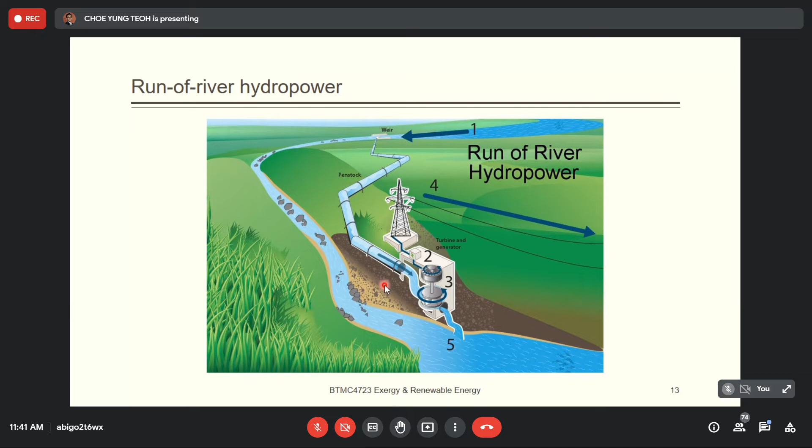Actually it's quite seldom and rarely used in commercial systems because the power generated from the system is normally quite low. Maybe you can build just to power a rural village, but to generate a commercial power plant, normally we will not use run-of-river hydropower. The power output is relatively low.

So the second one is called storage hydropower. Most commercial hydropower systems actually use storage hydropower. First, you need to build the dam.

The dam must be built where you have a large drop in elevation, a very big height difference. You can see that mostly you build it between two mountains, and then build the dam between them. This is not because of the height, but to save material.

Now, you want to make a reservoir, so you have to minimize the amount of material used. Normally the dam, the reservoir, will be built where you have a very narrow opening, because in the narrow opening, of course, the wall, the dam, that you need to build is much smaller.

At the same time, you need to cover the entire area, because the other area will be blocked by the mountain. There's only one path to flow out, so you block that path. This is the best idea.

So you build a dam to increase the water level, and you will store a lot of water behind the reservoir, depending on the rainfall. Then we have an intake.

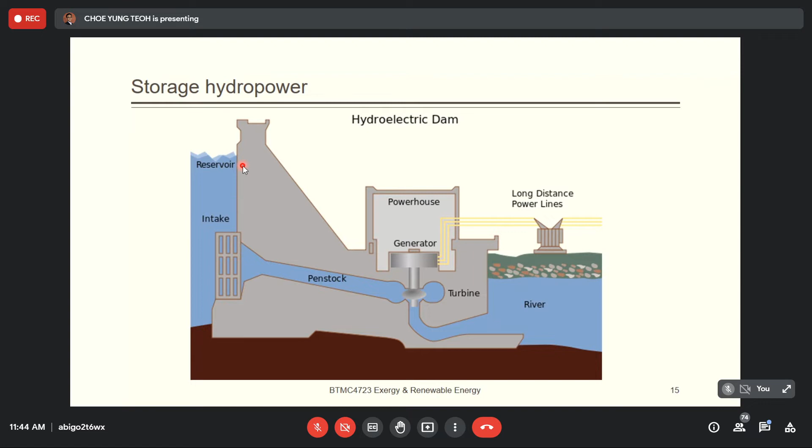Okay, this is the operation of the hydropower plant. I think it's the same as what I explained before.

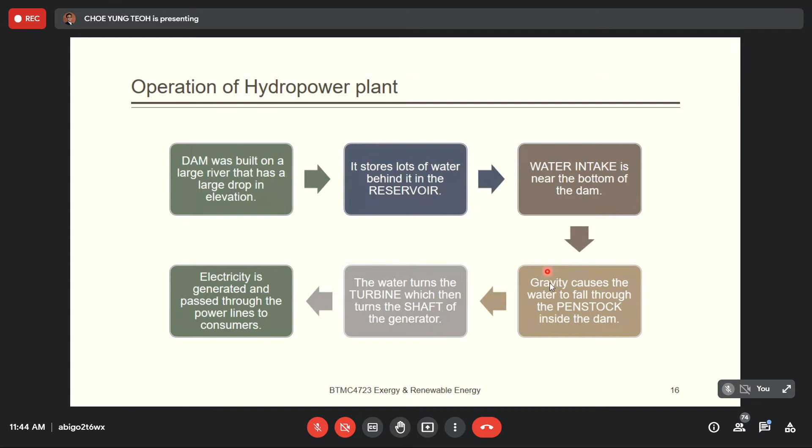Now let's look at the good advantages of storage hydropower. Typically it's a large system that uses a dam to store water in a reservoir. Electricity is then produced by releasing water from the reservoir.

There's one very special advantage of hydropower compared to other types of renewable energy: storage hydropower can provide base load as well as the ability to be shut down and start up at short notice according to the demand of the system. It can act as a base load because you can control the output. You store the water in the dam, so whenever you need, you can just adjust the number of turbines. Normally a dam has a few turbines.

Let's say you have 4 turbines. Depending on the demand, you can choose to operate 1, 2, 3, or all 4 turbines, and the output will be very consistent. Not like a wind turbine or PV photovoltaic, where the output totally depends on the input. But with hydropower you can control it because you have storage, storage in terms of water.

It also has the ability to be shut down and start up at short notice. For renewable energy like PV photovoltaics and wind energy, we are not going to start up and shut down constantly. We generate and capture as much energy as possible because we have no storage.

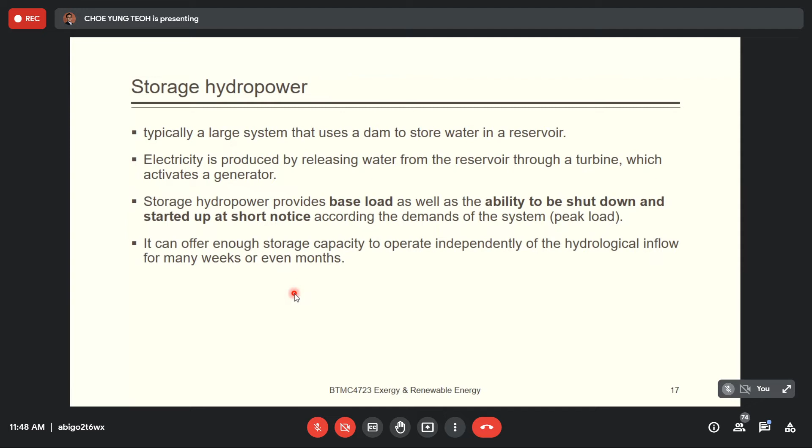Now we try to learn about the measurement of the head of hydropower. So let's say this is a hydroelectric dam, with points A, B, C, D, and E. How do we measure the head? Is it from A to B, A to C, A to D, A to E, or maybe C to E?

Any idea? Maybe think about it. It's been a long time since I took attendance, so this will count as attendance. I gave you 5 minutes together with the short break - give me the answer. I will put up a poll.

So we have a few options: A to B, A to C, A to D, A to E. What else? Maybe intake to C. Try to vote for your answer. Remember, even if you don't really know, still answer since it's related to attendance. I will do the summary at 11:53.

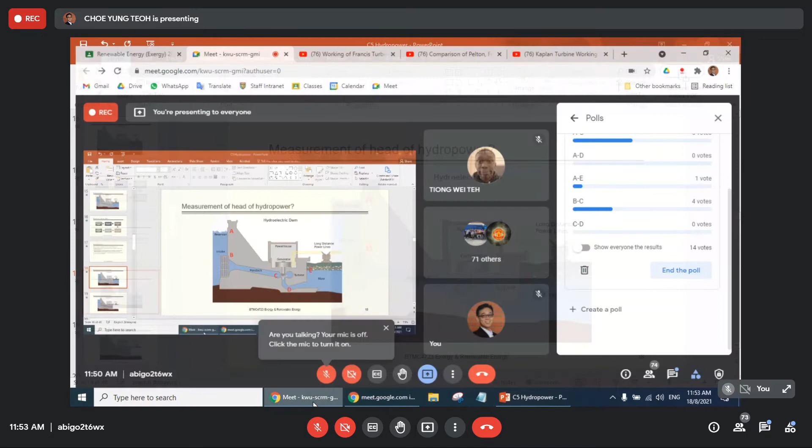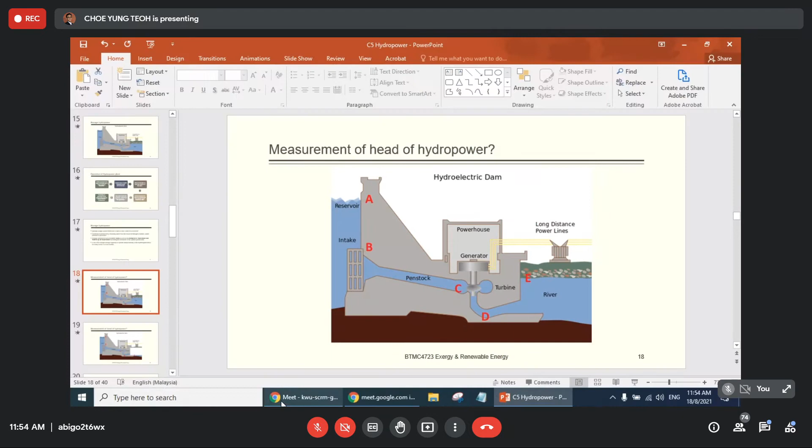Okay, A, B, C, D, E. Very few of you got the correct answer. The actual answer is AE. I think only 1 of you chose the correct answer, AE.

Okay, why? First, look here, A, B, C, D, E. We want to measure the head applied on C. But there is a head between point A and point C, which pushes the water out. At the same time, there's also a head between point E and point C, which pushes the water in. So to find the pressure difference at point C, you should take AC minus EC, so the only head you have is actually AE.

Maybe I'll give you another scenario. This looks like a U tube, filled with water. This is the turbine, and the water level at E is over here. So because of the height difference, the pressure pushes the water to flow through the turbine toward point E.

No question? Then let's talk about pump storage. Pump storage is where you use the turbine or pump to pump the water at night time. You can see at daytime, the water passes through the turbine, rotates it, and generates electricity. At night time, you use something to power the pump to pump the water upward.

What can power the pump? Are you going to use oil or fossil fuels to power the pump? Definitely not, because if you want to use oil to power the pump, why not just burn the oil at daytime to generate electricity instead? Remember, when you do the conversion, some energy is lost, so we try to minimize the number of conversions. So what kind of energy is always available at night but not in the daytime? If not harvested, it will be gone — it won't be stored.

Any idea how we want to power the pump at night? Yes, wind energy. We normally have stronger wind at night, but there's no demand for it at night. Factories may not operate 24 hours, just during daytime, 8 to 5 or 8 to 6. So at night time, you have excess energy which you can use to power the pump. Normally this system is attached to wind energy, a wind turbine. But is this considered wind energy or hydro energy? I would say the origin is from the wind, but the mechanism used is hydro. The mechanism is definitely hydro, but the origin of the energy comes from wind energy.

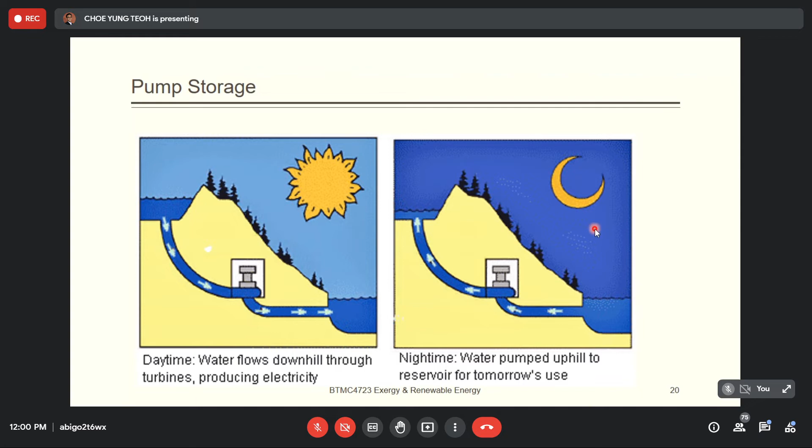Okay, next we talk about type of turbine. There are many types of turbine, so how do you want to pick the most suitable pump for your system? In general, we have 3 types of turbine: impulse, reaction, and gravity turbine.

Impulse and reaction turbines are quite widely used. Gravity turbine is not really used for electricity generation. Impulse turbine, if you read the word impulse, means that you use a very high velocity jet to push the turbine to rotate. You give the impulse in terms of water, something like a jet, high velocity jet, to rotate the turbine.

Secondly, we have the reaction turbine. Reaction turbine means that you have a very high flow rate. This flow will pass through some aerofoil blade of the hydro turbine and then create the pressure difference which imposes the lift force and rotates the blade. This is what we call the reaction turbine. In a reaction turbine, normally it will be fully immersed in the water.

And then for gravity turbine, it uses the weight of the water to rotate the turbine. It's more straightforward, simple, but of course you will not get too much energy output because you just use the weight, not the pressure.

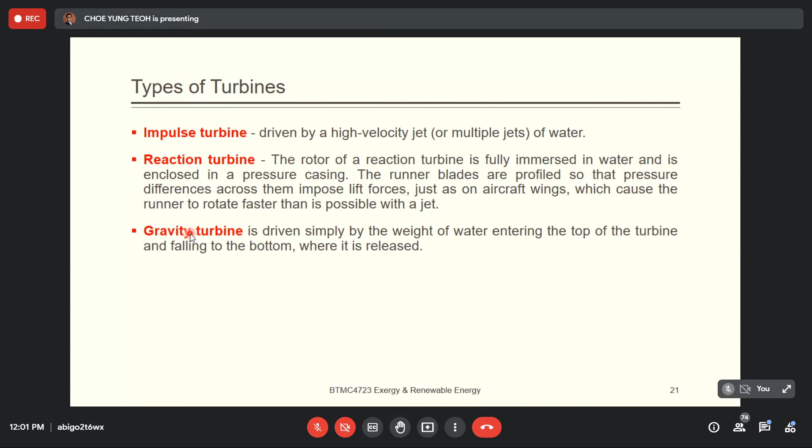So we will go through them one by one, starting with impulse turbine. Here we have 2 types of impulse turbine, which is Pelton and Turgo. Pelton is the more well-known impulse turbine. It's driven by a high velocity jet, or multiple jets, of water. You can see that the jet of water pushes on the cup over here, over the turbine, and rotates the turbine on the vane and blade. This one we call the Pelton turbine.

And then you can see that actually the cup is something like this, something like a crab shape. You can see there's an opening at the back, just to allow the continuous flow. After you push on the front blade, you go to the second blade, or cup. So you have to continuously push on the blade to rotate. This is the idea: you push on the blade to rotate.

The second one we call the Turgo. The only difference is that the Turgo has the jet enter at a certain degree, maybe around 20 degrees, to the plane of rotation. This one you can see is 90 degrees, straight, pushing on the blade and rotating. But for the Pelton turbine, one jet can only hit one blade or one cup at a time.

But this Turgo turbine, because it enters at 20 degrees at the side, makes it possible to use a larger jet relative to the turbine pitch diameter. It can handle more flow rate per time. So if you have a higher flow rate, then you can consider using the Turgo turbine.

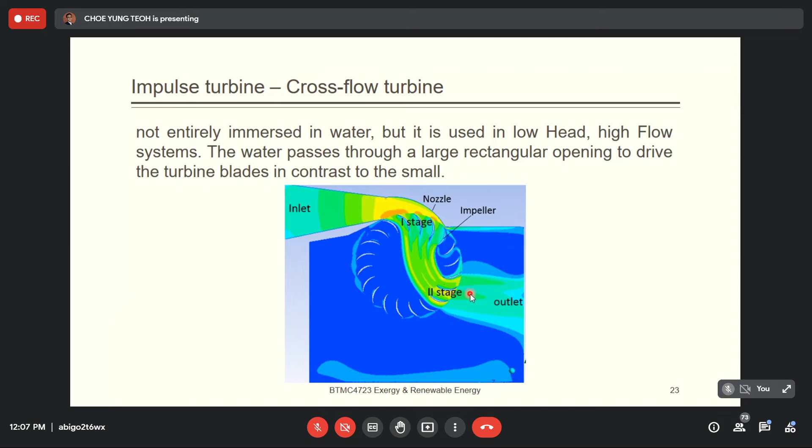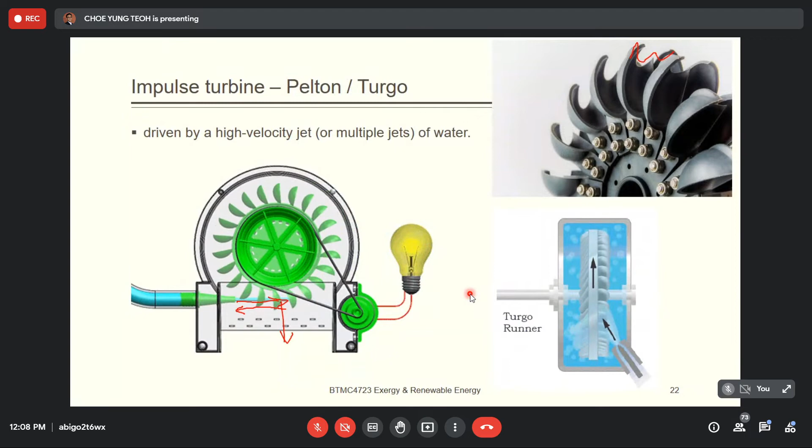The next one is called the reaction turbine. The Francis turbine is the most widely used water turbine today. This type of reaction turbine is an inward flow turbine that combines the radial and axial flow concepts. The Francis turbine is the most common water turbine used today, combining radial and axial flow. Later I will show you how it's combined.

This is a type of turbine that develops torque by reacting to the pressure or weight of the fluid. They use the weight and pressure of the fluid, and the operation actually uses aerofoil theory, meaning it creates a pressure difference, which creates lift force, which then rotates the blade.

Before we look at the Kaplan turbine, let's look at the Francis turbine. The flow goes in from the side, which we call radial flow, passes through the turbine, and goes downward, becoming axial flow. So it goes in by radial and goes out by axial.

Now we have the new one called the Kaplan turbine, similar to the Francis turbine, but now it has movable blades. The blades can adjust according to the flow and pressure, giving an adjustable blade to achieve efficiency over a wide range of flow and water levels. It's more complicated because the blade angle must rotate to get higher efficiency. Supposedly the Kaplan turbine has higher efficiency, but because of the moving parts, the cost is also higher.

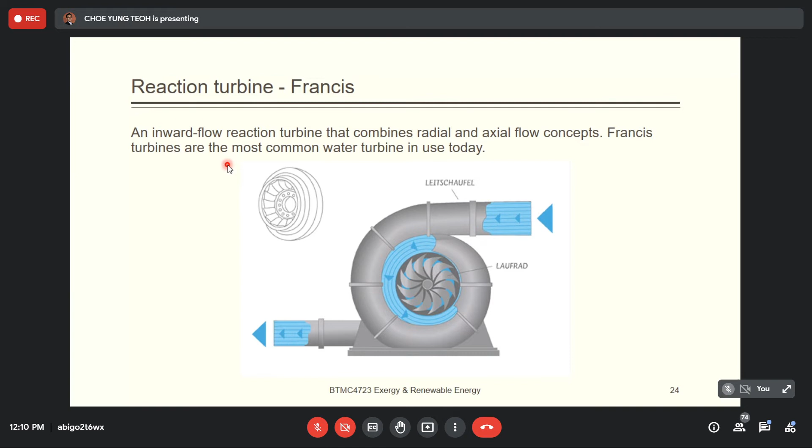In most situations, the flow rate and head are quite consistent, so we don't really need a Kaplan turbine, which caters for different flow and water levels. We use the Francis turbine, which is good enough for many cases. That's why the Francis turbine is the most commonly used water turbine—cheaper and good enough for standard water levels and flow rates. In certain situations where the flow rate and water level keep changing, then we can use a Kaplan turbine.

This Kaplan turbine allows efficient power production in low head applications. So whenever you have low water level, you can use a Kaplan turbine. So how do we do it?

You can see that the blade of Francis turbine is something like straight. So if the head is very low, the water, because the opening is very big, will just go through the turbine and then go down. It won't rotate the turbine. It will flow out through the turbine, but the turbine is not rotated.

Remember that the turbine is connected to a generator. You need quite a very high torque to rotate the turbine. So if the head from the water, or the pressure of the water, is too low, then you cannot rotate the turbine. But for this Kaplan turbine, it's very easy.

Now the head is very low, so I change the blade angle. I make it flat, something like I close the opening. So now, the water has no choice but to press against the blade to go through and flow downward. So in this case, you are still able to operate at the low head condition.

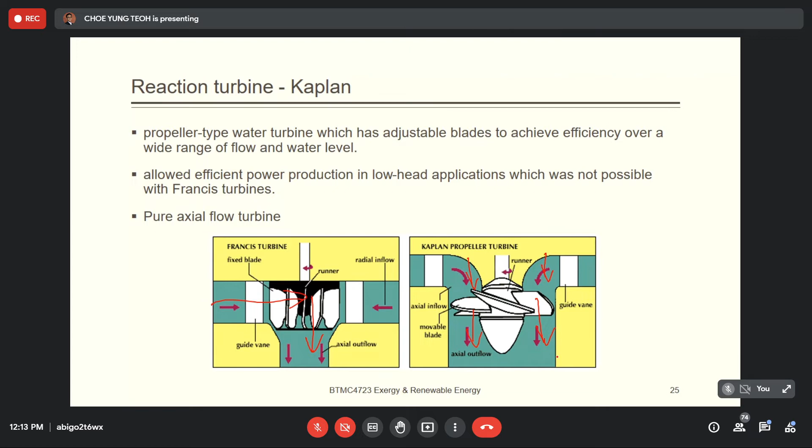So this is the difference between Francis and Kaplan. In terms of outlook, it should be like this: Kaplan turbine, you can see this one you can rotate the blade, and then Francis turbine has a fixed blade.

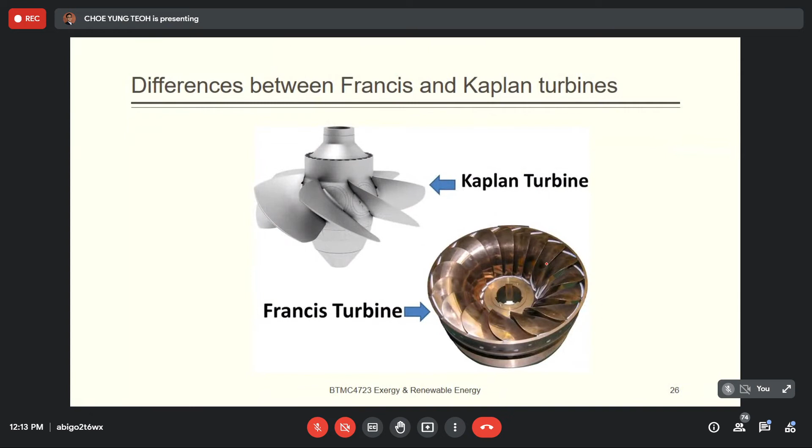And this one is more compact. The head - normally we need higher head to operate the Francis turbine than the Kaplan turbine.

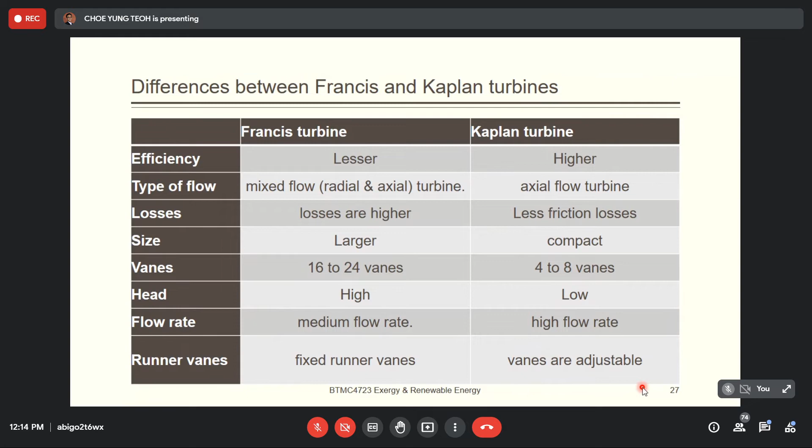The next one is called gravity turbine. You can call it Archimedes screw or overshot water wheel. So we just use the water density, the weight of the water, to rotate the blade. You hold the water and then the weight of the water will rotate the turbine.

Normally the efficiency and power output is quite low. Normally it's not for power generation, but just to rotate a pump or whatever. It's a quite traditional method of usage of this hydropower.

This is the turbine classification. You can see that we have different head classifications, so which type of turbine can be used? Below, more than 50 meters, you can use Pelton or Turgo, which is very high head. For medium head, this is the turbine you can use. And for low head, this is the turbine you can use.

You can see that gravity turbine is only applicable for low head - even with high pressure, no use. Notice that the intake is just a water flow. If the pressure is high, then it will just pass through the turbine. You can see that if water pressure is very high, it will flow very fast, so it just goes down, lower. It won't rotate the turbine.

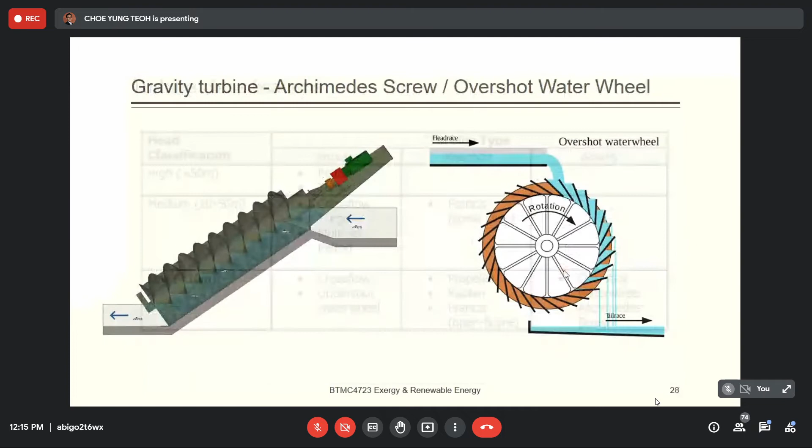So this gravity turbine is normally only applicable for low head, which is not suitable for power generation.

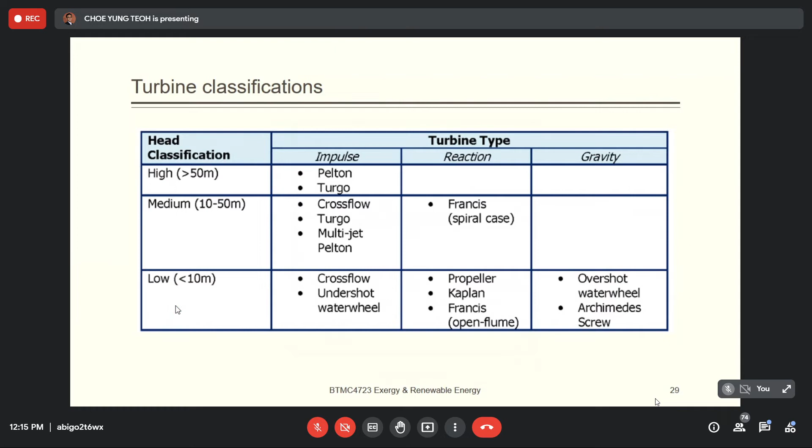If we look at the more detailed picture, this one shows the relationship between head and flow. We have 6 types of turbines here. So let's say at a head of 50 meters and a flow of 10 cubic meters per second, what kind of turbine can you use? You can base it on this figure, this graph, to identify which type of turbine you can use.

Okay, so let's say this one I said 50 meter head and 10 meter cube per second of flow. So it's really this one. So you can use Francis turbine, you can use the Kaplan turbine. These two only, the two that are at the end already, so normally will operate at a very good efficiency. So you can use Francis and Kaplan at this case. You can base on this one.

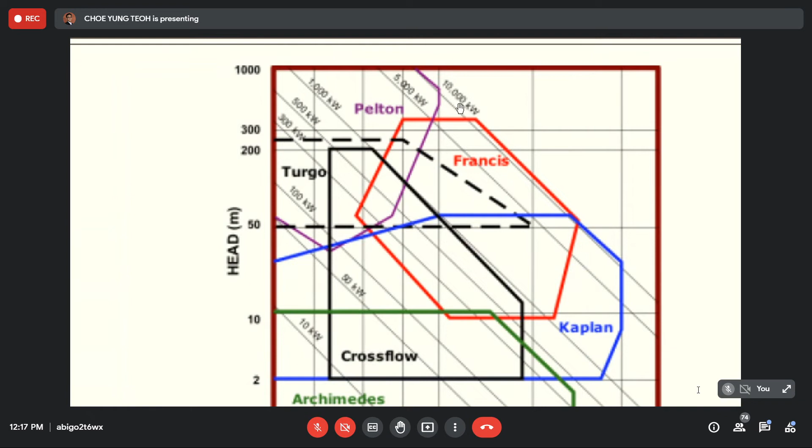Another thing, other than head and flow, you notice on this chart the diagonal line shows power: 10 kilowatt, 50 kilowatt, 100 kilowatt. So you can see that Francis turbine is normally operated at a higher power, meaning it's a larger scale, up to 10,000 kilowatt. But some of the turbines are not able to operate at a high power. For example, cross flow up to 1,000 kilowatt only, but Francis can get up to 10,000 kilowatt, 10 times higher. So you have to consider the type of turbine, what power output, what head and flow you have in the system, and then you will choose.

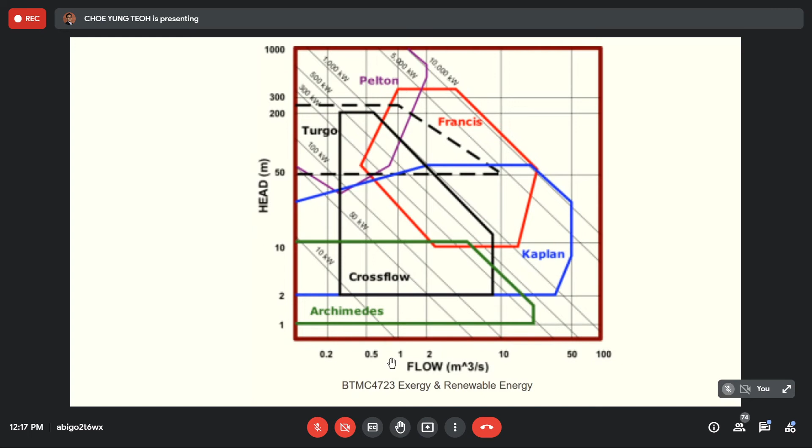But the head here is of course the net head, and the flow here is the design flow, not the flow of the river. So this is the best guideline to choose the type of turbine, but of course this is just a general guideline. Francis turbine also has different types and comes from different manufacturers, so you should always refer to the specification given by the manufacturer.

For example, something like this, they'll give you the minimum flow range for that kind of turbine. For example, Francis turbine minimum flow range is 0.5 meter cube per second. Below this, Francis scale turbine cannot be used. And the maximum flow range is 900 meter cube per second. You can see the range is actually very, very huge compared with other types of turbine, where the flow can go up to 900 meter cube per second. But you can see that Pelton is just 60, 10, 50, so comparatively a very, very low flow rate.

And then the minimum head. You can see that Pelton and the Turgo are actually impulse turbines, so you need a higher head to operate, at least 50 meters of head, and the maximum gets up to 1,000 meters of head for Pelton turbine. Francis turbine can already operate at 10 meter head.

And you can see we have this optimum flow exceedance. What does it mean by flow exceedance? Flow exceedance is the percent of time that the design flow is exceeded. What's the meaning? Something like this: the water level keeps changing, changing from 5 meter to 10 meter, 5 meter to 10 meter throughout the day. So let's say my design flow is set at 8 meters, so some of the time the water level will be more than 8 meters.

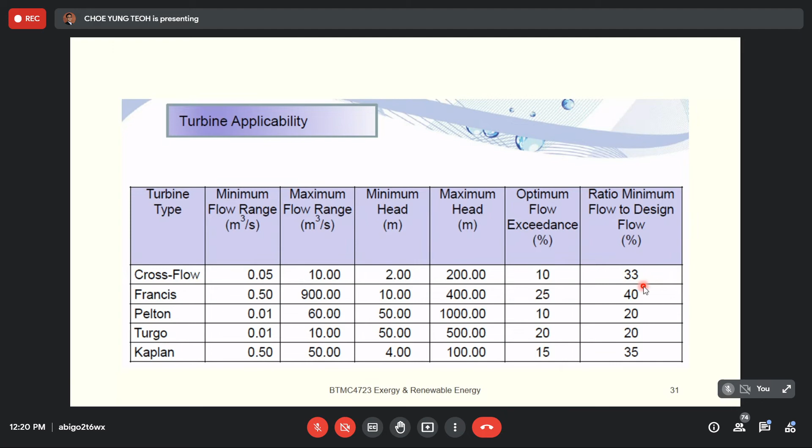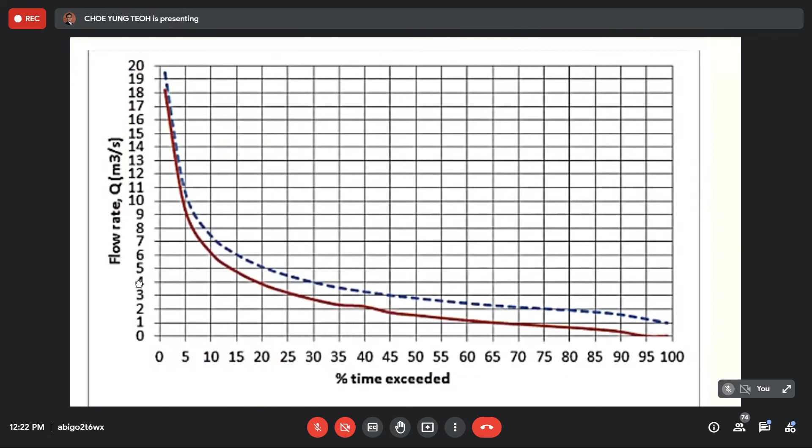First question: indicate the percent of time that the design flow is exceeded. So the design flow is given as 2.7 meter cube per second. Where is 2.7 meter cube per second located? At here, you see.

Do you understand the graph? This shows the flow rate against the time exceeded. At a very high flow rate, the time exceeded should be lower. So in 1 year, let's say the flow rate is 17. In 1 year, 3% of the time, the flow rate is more than 17. Can you understand the concept here?

So let's say I take the flow rate of 1 meter cube per second, here. It means that 60% of the time, the flow rate is more than 1 meter cube per second. This is how we read the graph.

And then you always have the 2 lines. One is called total flow, one is called the available flow. Total flow will be different from available flow because some of the flow will be restricted by environmental or legal conditions, maybe in terms of how much water you can release to the downstream per unit time for flow rate. So you always have the total flow and available flow.

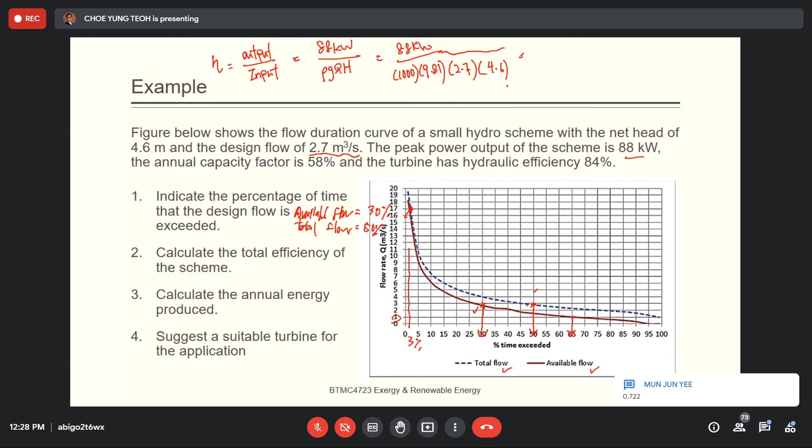So the total efficiency is 0.722, or 72.2%.

Do you notice that the question gives you the hydraulic efficiency of 84%? Hydraulic efficiency is not referred to as the total efficiency. Hydraulic efficiency is defined as a ratio between the power given by the water to the runner of the turbine and the power supplied by the water at the inlet of the turbine. So it means how many percent of the water can be absorbed by the turbine - that's what we call hydraulic efficiency.

But the total efficiency includes the conversion and transmission to the grid, including the generator efficiency. Hydraulic efficiency just depends on the turbine itself - how much energy of the water can be absorbed by the turbine, and then the energy from the turbine rotates the generator and produces electricity. So the total efficiency will normally be lower than the hydraulic efficiency. This just confuses you by giving you this value, but actually we don't use that in the calculation.

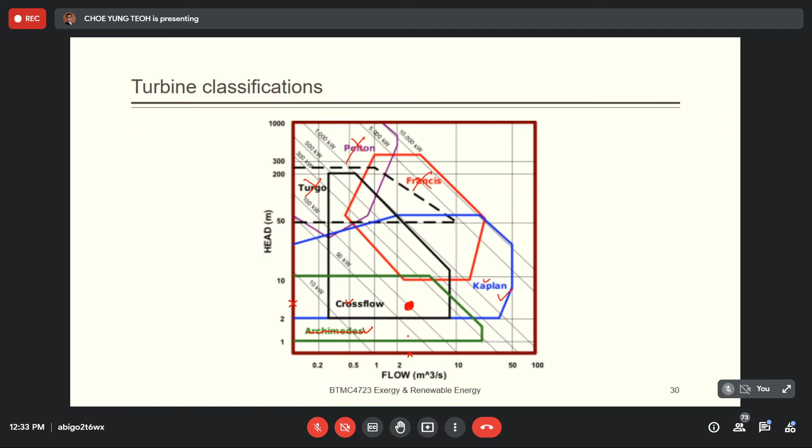So cross flow and Kaplan. Kaplan normally will give you better output and it's more widely used as well. But of course you could choose cross flow, I cannot say you're wrong, because based on the table it's still within the range. Okay, so in this case we can use a cross flow or Kaplan turbine. So you suggest, based on the flow rate, the head, and also the power output, the Kaplan turbine is a suitable turbine for this application.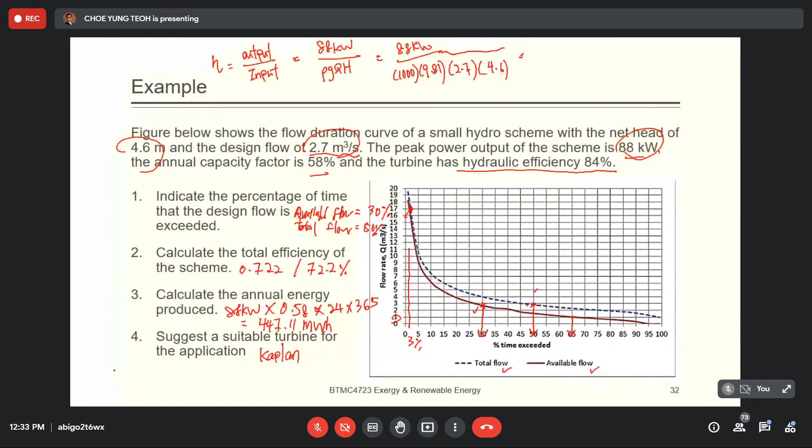Okay, then we move to the next one. These are the advantages of hydropower. Okay, pollution free and clean.

So do you want to cut off the 'clean'? It's no longer green - the operation is green, but the development is not green. So if you want to use the word green, you have to further justify what you mean by green. It's green during operation, but during the construction of the dam, it actually generates a lot of carbon dioxide. Okay, next, very high efficiency, up to 95%.

Little waste of heat - you do not generate any heat from the system, only a little bit from the friction of the rotation.

While the initial cost is high, they are very low cost overall. Normally a dam can operate for 100 years, so although it's very expensive, it can last for a very, very long time. So in the end, they are very low cost in general. It is very reliable, and the output can be easily adjusted based on demand without affecting efficiency.

It can be a recreational advantage. Normally the dam can be made as a park, a recreational park. And then it can be used for water storage - you can store the water, and it can act as flood mitigation. You can control the flood because you control the water flow downward to the downstream, so in other words, you're able to control the flood.

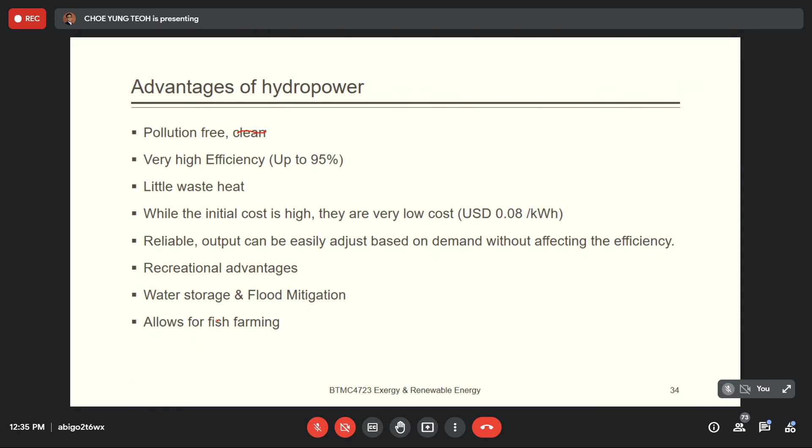And then it allows for fish farming - other than storing water, the dam can also be used to farm fish. Okay, this is the advantage of hydropower, and of course they also have disadvantages.

So first one, it will affect the riverine ecosystem and alter the hydrological cycle. Riverine ecosystem means how the fish live in the river. Now you change the water level - do you know that different types of fish survive and live at different heights or different water levels?

Some of the fish are not able to survive in very deep water, maybe because the pressure is too high. But some fish in the river need very deep water. So if you change the depth or change the water level, it will definitely affect the riverine ecosystem.

And because when you build the dam, the water level mostly on the upstream will increase, then the plants under the riverbed definitely will not get enough sunlight, because it becomes too deep and they are not able to get the sunlight.

And then it also alters the hydrological cycle. Hydrological cycle means how the water moves from the land and ocean surface to the atmosphere and back in the form of precipitation. So now you change the location where that water is, so of course you change the hydrological cycle.

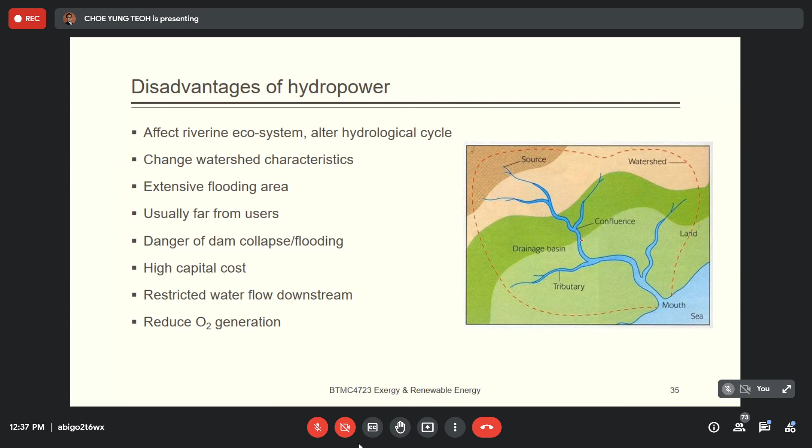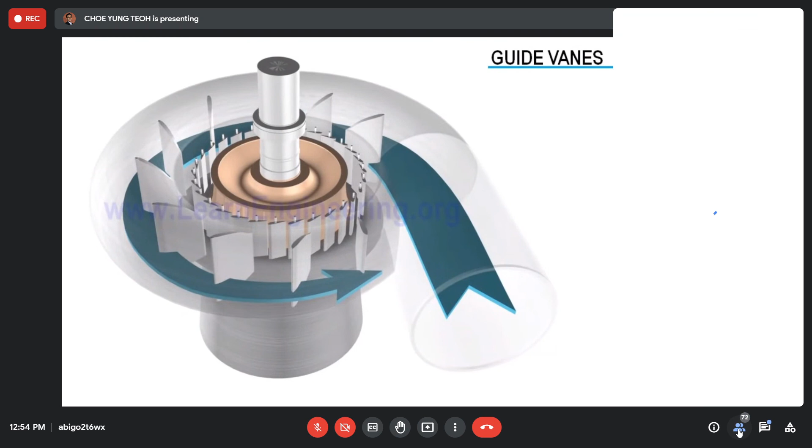Demand for power may vary over time. The guide vane mechanism is used to control water flow rate and make sure that power production is synchronized with power demand.

Apart from controlling flow rate, guide vanes also control the flow angle to the inlet portion of the runner blade, making sure that inlet flow angle is at the optimum angle of attack for maximum power extraction from the fluid. Low pressure at the exit side of the turbine may cause serious problems of cavitation.

So a carefully designed draft tube is fitted at the exit side to discharge the fluid out. The draft tube transforms velocity head to static head due to its increasing area, and reduces the effect of cavitation.

Hope you had a nice session on the working of Francis turbines. Thank you.

Okay, so have a look at the comparison between Pelton, Francis, and Kaplan turbines.

Francis and Kaplan are the most commonly used hydraulic turbines. In this video, we will compare these three turbines and see when to use them. First is the impulse turbine, which is the Pelton turbine. Then second, Francis and Kaplan, which are reaction turbines.